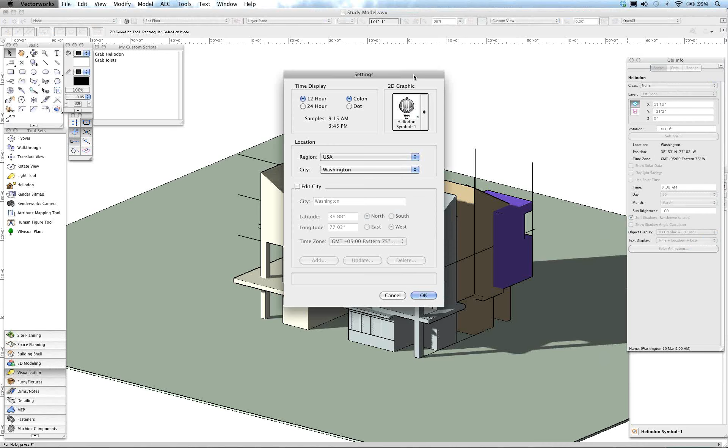And that's all fine and good, but where are we? If I cancel out of this, or accept the default, either one, we can see that we're in Washington. I'll open up the settings dialog box that'll show me a little bit about how I can control the heliodon further. We've basically broken the globe into regions, with the good old USA being one region, then further broken out into cities, and you can see we're defaulting here to Washington, D.C.

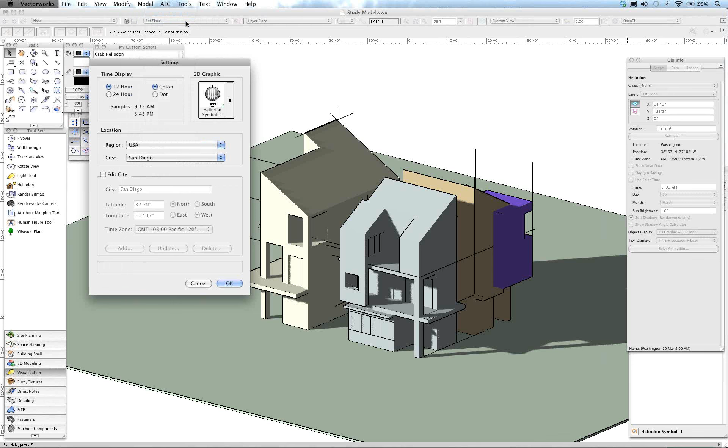I understand many of you are out there on the left coast, perhaps in San Francisco or San Diego. I'll choose San Diego, for instance, and what we'll see is that the sun can now be studied as if you were in San Diego at any given time of the day.

So anyway, that's just sort of a new feature for Vectorworks 2012. Thought you'd like to see that. It can give you some information that might be relevant to your building information model.

I'll switch my view to include maybe a plant object, and as you can see, the sun is going to cast a shadow here under the tree. If I go back to my solar animation, I can move the sun throughout the day and see how the tree casts a shadow on the little buildings.

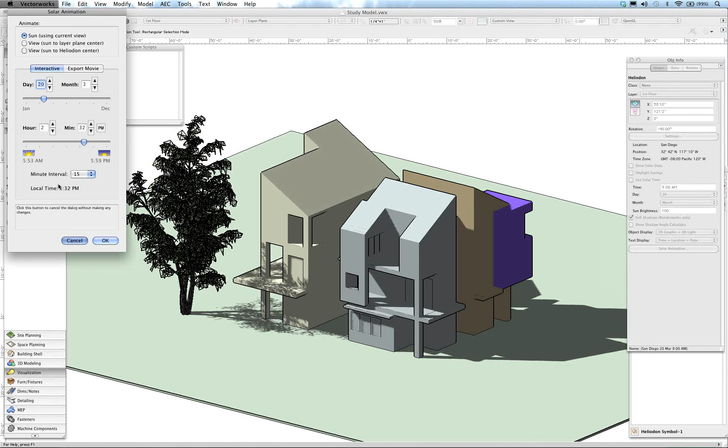Of course, if I move the model around, we can see that in the afternoon we're going to get some sun blocking our porch there, which might be a good thing. So that's a little bit about the Heliodon tool.

What I want to do now is switch back to my first model view, which will get rid of my little tree object there. All I'm doing is using saved views to control that. And perhaps what we can do now is take a look at the model. I just blew away the shade and shadow, and the Heliodon tool here, just so the model will respond a little better.

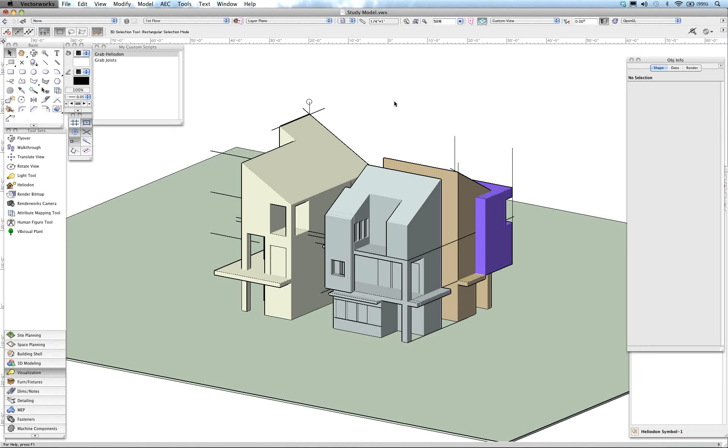So now maybe what I could do is demonstrate how I might go about building an information model, like I said, from a simple massing model. So what I might do is start, let me turn on my nav palette so I can tell what layer and class I'm on. That's always important to have open.

So what I'll do is maybe just start with a footprint of a new building, and perhaps I'll make it, I don't know, 25 feet deep and 16 feet, let's say, wide.

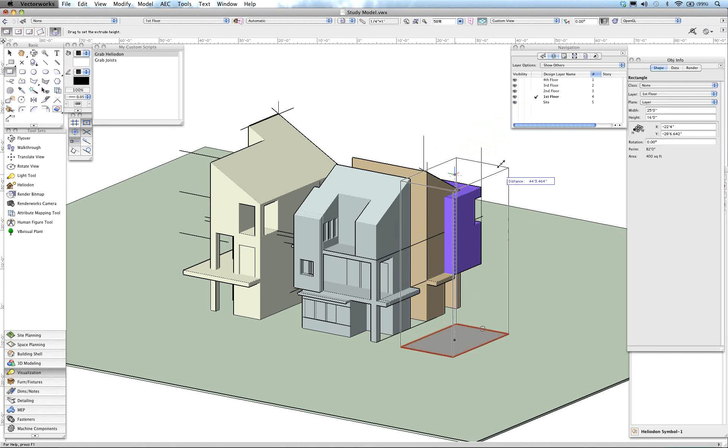So there's my rectangle here, and you can see that it's defaulting to red, which means I can use the instant push-pull to automatically create this new building. As you can see, I can move it up dynamically, or with the little heads-up display there, I can type in a fixed distance, let's say 50 feet. That will give us enough for maybe a 4-story building and some change.

So here's my form. Well, let's further define it a little bit. So I will maybe give it that sort of distinctive roof form like you see here. You can see when things are glowing in blue, what that means is the automatic working plane is sensing a plane and is setting the working plane to it.

So if I highlight this particular front face, I'll go ahead and create a roof form. And then I'll use that push-pull tool. If I hold my Option key down, it will automatically cut off that portion of the roof.

Maybe we'll do that again. I have these sort of covered entry spaces down here, so maybe I'll go through here and create another one down here so we can actually get into the building comfortably without having to stand in the rain. So there you have it.

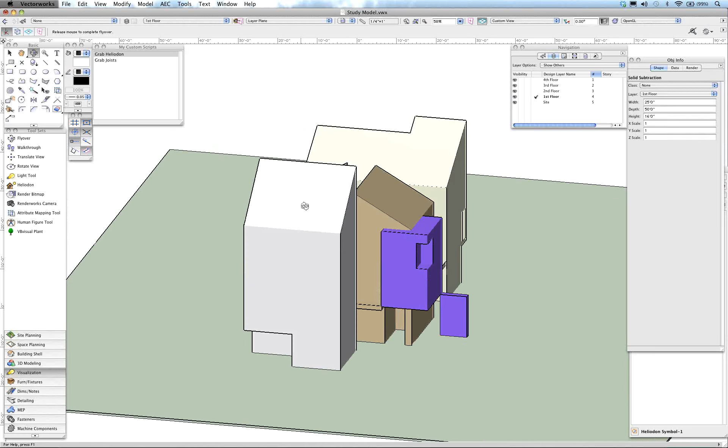There's our form. And we can, of course, use the flyover tool and fly around and check it out and make sure that it's the right massing. I kind of like that. So there you have it.

Of course, what is this object? Well, this object is a solid subtraction. And what information can we get out of that? Well, probably not that much. So what are we going to do? Well, we could either end the webinar right now, which might not be a good thing, or we could continue trying to get a little more information out of our model.

So what I'll do is use a command that can create walls directly from our solid subtraction, and you do that under Space Planning, Model to Floor Plan. If I click on that, we'll see that if I check or uncheck these different layers, they'll be included in the model. And I'm going to go for like a 4-story building, so that's why I've got 1 through 4.

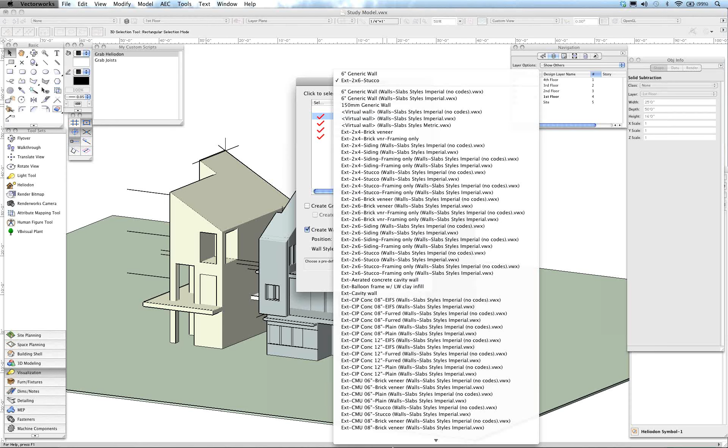Down here, I can position the walls either inside, outside, or to the center of the existing massing model, which is our white blob there. And I'm going to use a wall style - we ship with a whole lot of wall styles, as you know, this is not new to 2012. But I'm going to use the 2x6 stucco wall style because I kind of like it. And I'll just click OK.

And of course, Vectorworks is going to grind away just for a second to create those walls from the massing model. And there you have it. So what I'll do right now is just blow away that massing model form. We don't really need it anymore. These are now Vectorworks walls.

If we go down here and hover over one, that highlight, we'll see in the Object Info palette that it is truly a Vectorworks wall. It's exterior 2x6 stucco, and it's on the first floor. And it's in the class wall exterior, just like it should be. And that's a good thing.

So there we have some walls right from our massing model. We didn't have to go back. We didn't have to redraw anything. We just moved forward.

So let's see what we can do with these walls. Well, they are typical Vectorworks walls. So if I go to my building shell, I'll insert some doors and windows in them, just like you would expect. So here's a couple of windows. Come around here to the front face, pull in the front.

Sure, I like that. Maybe a door object, so we can get into the little model. Here's a door object. That particular door is like a solid core door. Might not like that, so let's create maybe a glass panel door so we could get some light into our project. Yep, like that better.

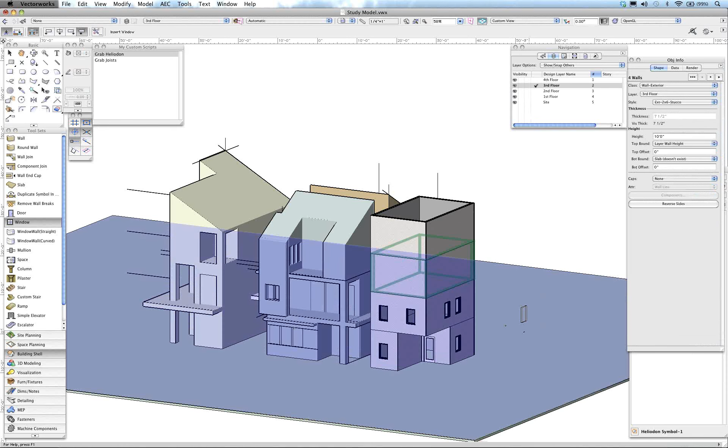So let's go up to maybe the third floor. You can see the whole project's glowing blue - that's because the automatic working plane is sensing the site, but don't let that confuse you. So we're just going to put some more windows in. All I'm doing is moving the window object near the wall, letting it sense it so it glows red there, and then I'm just going to align to the window below and insert my window just the way you always would. So there we go.

See a couple more. Maybe we'll even - whoops, missed on that one - put some on the fourth floor here. So we'll go up here to the fourth floor, go to Windows, align it to the window below. Yep, there we go. It takes a little while, don't forget, because it's rendering each time I make these moves. I've got it set up for rendering in OpenGL.

This isn't a new feature, but I'll show it anyway. OpenGL options here - you can see that I've got my settings. I've got it set up to show shadows and draw edges, so you can kind of see the highlighted edges of the project. So there you have that much. So we have windows in our project.

Well, that's very good, so what would we do? Typically, what we would want to do, certainly down the road, is create a window schedule. So how are we going to do that? Well, let's see, I'm going to go to Show Snap Modify Others in my layer settings. The reason for that is I did notice while I was placing these windows, if we look in the object info palette, that I don't have it checked on schedule. So what that would mean, of course, if I ran a window schedule, I wouldn't get anything on it.

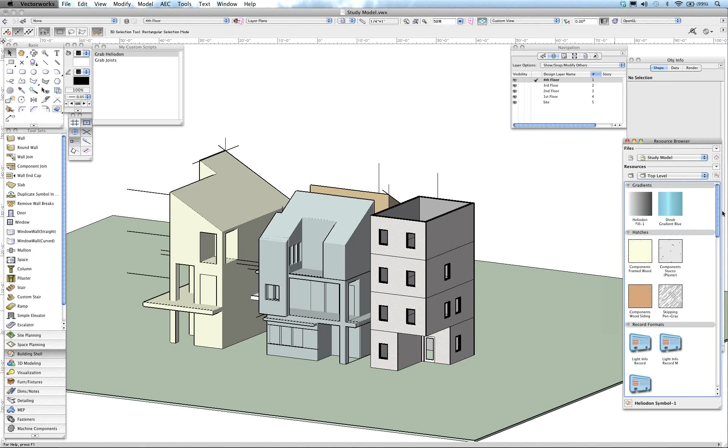And as we can see, nothing happens visibly here, because behind the scenes it created a schedule down in the resource browser. If I right-click and say Open, that opens the window schedule. So we'll place this schedule right here and move the model up a bit so we can see. What I want to do is show a little bit of two-way worksheet ability.

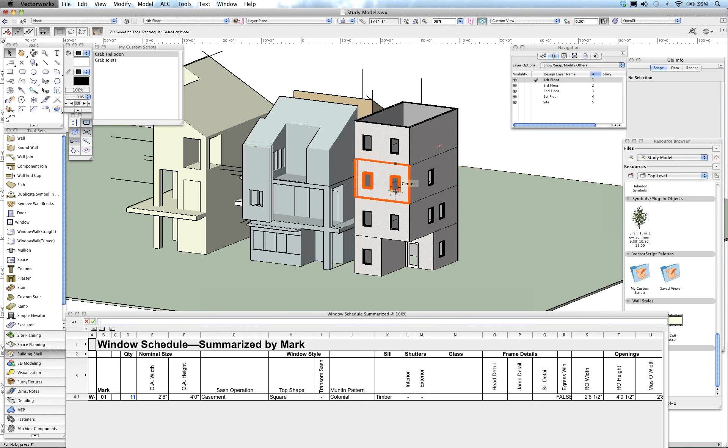Here are all 11 of my windows accounted for in the schedule. Let's zoom into this window and grab it, and perhaps create a corner window. We'll tick corner window here, and it'll go over to the corner automatically. Then its mate over here—we'll tick corner window too, and they'll link up and create a corner window just the way you'd expect. Pretty cool.

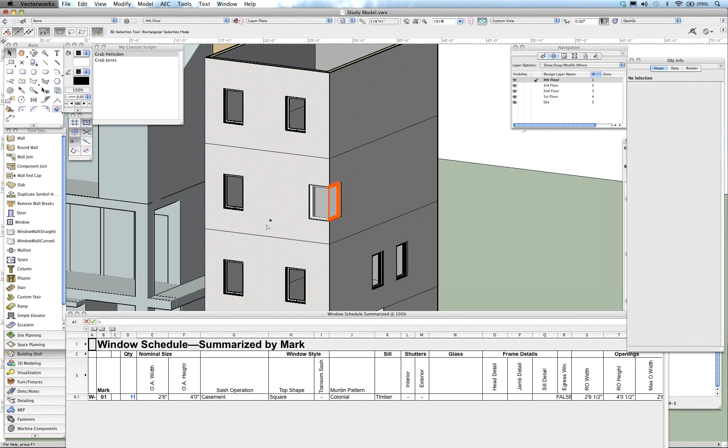So here is another window—actually, that's a wall, so let's pick the window instead. We'll make this one a little wider, typing in 60 inches, and click OK.

Now I want to recalculate the window schedule to reflect those changes. We can see that we now have 8 of the 2'6" by 4'0" casement windows, here at the bottom, plus a couple of corner windows and the one I made real wide.

Well, let's say I don't like that design. I can change it here in the model, or I can also change it here in the worksheet—let's go to 48 inches, and we'll see the window change width. Perhaps this one, currently 2'6", we'll change to 24 inches, and the window gets narrower. If we recalculate the worksheet, it'll be reflected there too.

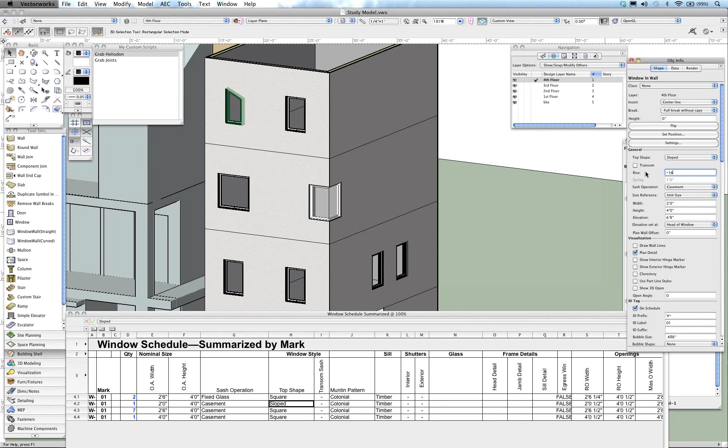There's my window. If we want a square top, which it's defaulting to, maybe instead sloped to the roof once I put a roof on the project. Don't like that slope—it's going the wrong way. Maybe we'll put a 16-inch slope going the other way. So there you have it.

So what we can see here is that I can get the worksheet to control the geometry in the model, or I can change the geometry and it will be updated in the worksheet. That will save you a lot of time and errors in creating door and window schedules. So please, even if you're drawing in 2D, go ahead and use the automation of the wall tool and door and window objects so you can create these schedules.

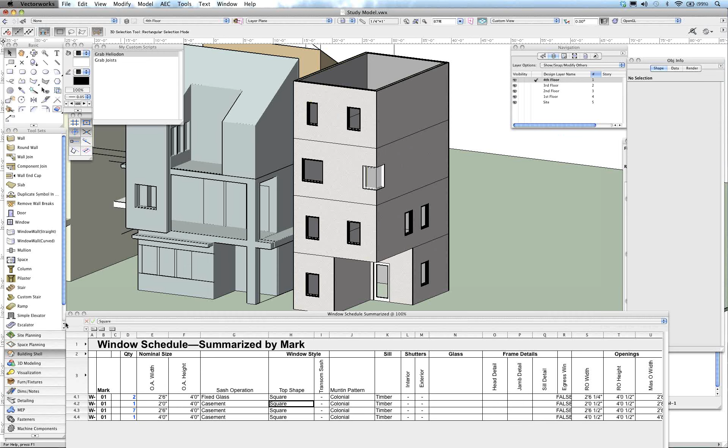So I guess I'm done with the window schedule, so I'll make that go away. Here we have our little model, but right here we have this overhang that looks a bit tenuous to me. So maybe what we should do is put a column object right here under the overhang, and we're going to have to do that on the first floor.

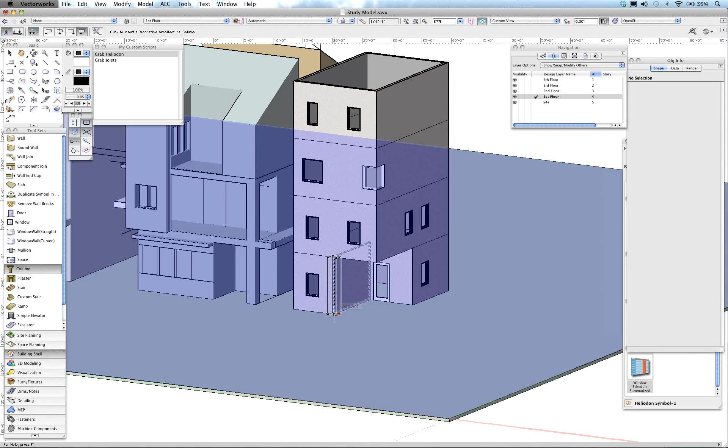Using my cursor cues, I'm going to pick up the corner there, and the corner here. When I drag my column out, you can see the red and green lines join, so I know I've got it right in the right spot. And there's my column.

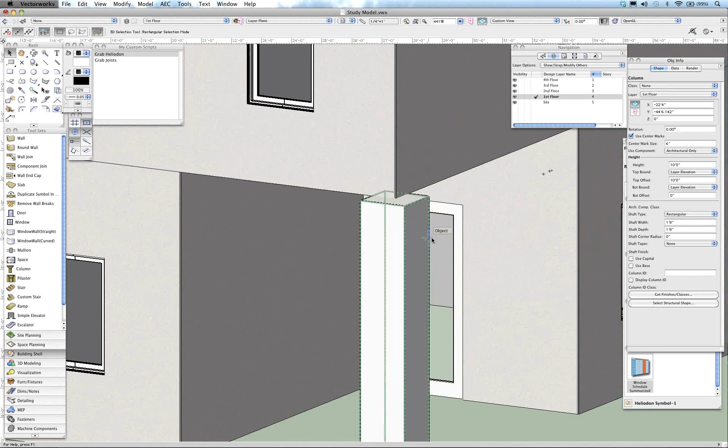Problem is now I have this little overhanging scenario that might be kind of a problem to flash. So now I want to move that column back under the building a little bit. We're in a 3D view, so I need to move it in 3D—you do that by Move, then Move 3D, which gives you all three axes in which to move it.

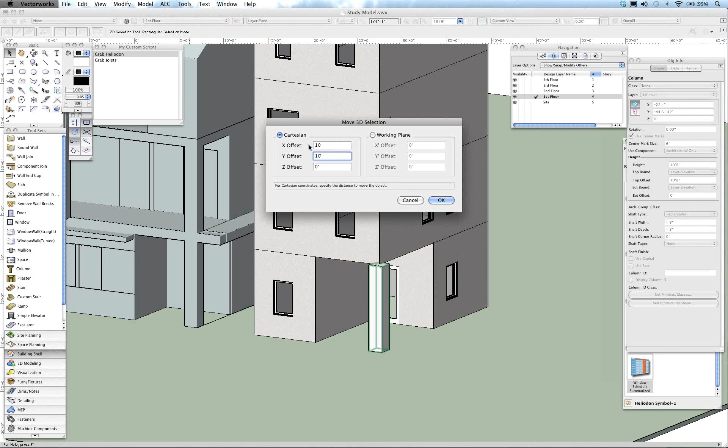I know that column is about 18 inches square, so half of that would be 9. Maybe I'll move it under there about 10 inches to give a little overhang so water won't run down into the column. When I hit OK, the column moves back under the building just the way it should. So there you have it. And if we move around the little building, we can see that we're pretty good to go. Zoom out a little bit.

All right, I kind of like that. Let's see, next I'll be a little cautious of time here.

Since we now have columns, windows, and doors, maybe we ought to create some floors. As you can see, if I rotate the model around, you can see right down through it. There are no floors at all in the building right now, probably difficult to walk in there.

So let's create a floor, more specifically a slab object. I'm going to do that on the 4th floor so you guys can see it happen. I'm going to control the layers a little more carefully so I don't accidentally snap to one I don't want to. With that set to show others, I'll be able to operate here on the 4th floor. I'll use my trusty slab object in the building shell toolset, go around and pick walls like that, and then the green checkbox or Enter key will say OK to accept what I've done.

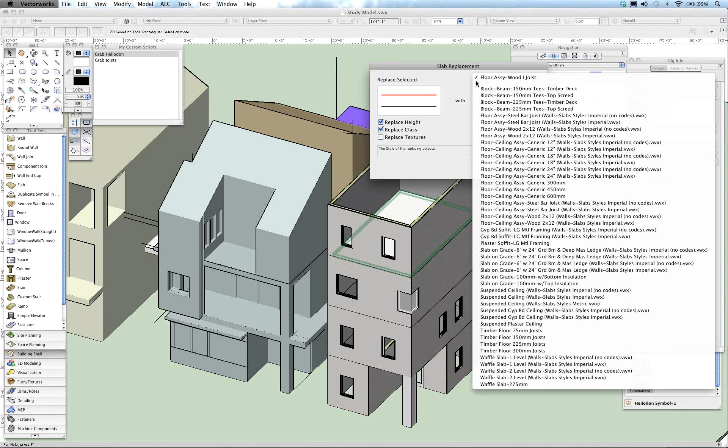As you probably know, Vectorworks ships with a whole bunch of slab styles pre-configured. Of course, you can build your own, like I've done here, floor assembly wood I-joist, which is one I made to accommodate the depth of an I-joist, and we'll get to that in a second. Anyway, I'll just accept the default, and you'll see that the slab is now thick enough to accommodate some I-joists. Well, how about those I-joists?

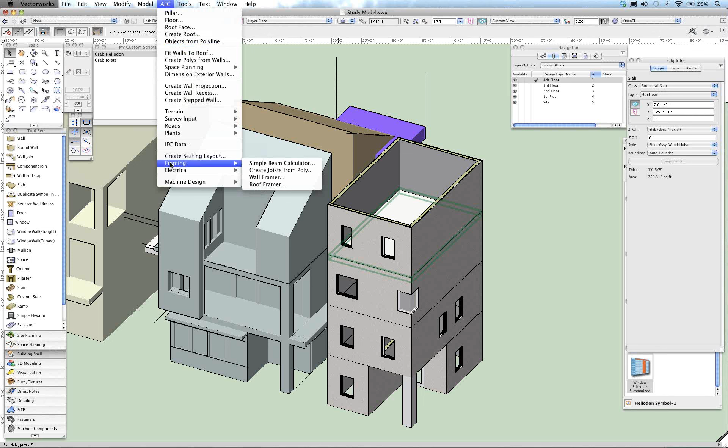Let's take a look at maybe framing this slab. So what we'll do here is go to AEC and framing, then create joists from poly. This command isn't necessarily new, but some elements within it are, like the ability to place our soon-to-be floor joists in a certain location within the slab. This is by component. I only have two components in my slab style: one is T&G plywood deck, which would be the subfloor, and the other is the joist gallery, that's where I want those joists to appear.

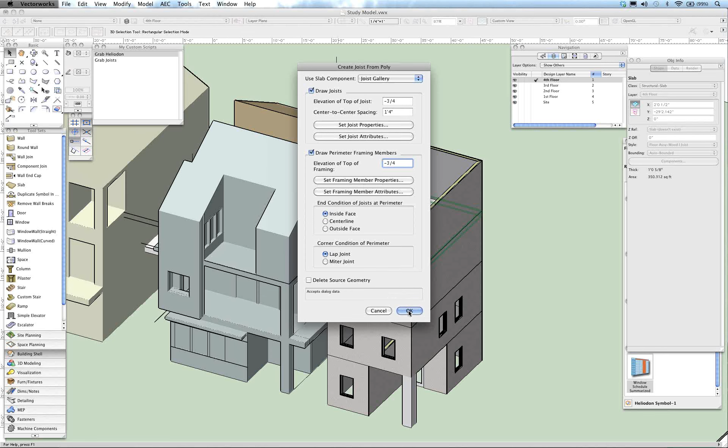So I will just offset them slightly so that they will appear in the correct place, and I'm going to accept the rest of the values here. You could do different joists, et cetera, and further define the colors and texture of the joist, but I'll just accept those values and click OK. Now it's going to ask me how the joists are going to run, which direction. So you pick 2 points, and I'll just say OK.

If I highlight the slab, you can see two things happen: one, it created the joists, and two, it created a joist takeoff for me. This was all automated, I didn't do a thing other than click the mouse a couple of times. So that's a little more about getting down the road towards BIM, as we can now actually count how many joists there are.

But I said I wanted to use engineered I-joists, and these are defaulting to just regular solid beams, as you can see here. So under structural use, I'm going to change that to joist, just so if I run any subsequent schedules, they'll actually show up as joists, I'll know what they are. And then they currently say solid beam.

Well, what I want to do is use an engineered I-joist, which is a custom profile. So I'll select custom profile, and it will take a second... ooh, look, I'm getting odd custom profiles. Gee, let's look at what I got. Oh, I got some trees, well that probably isn't exactly what I want. I actually want these, which of course are I-joists.

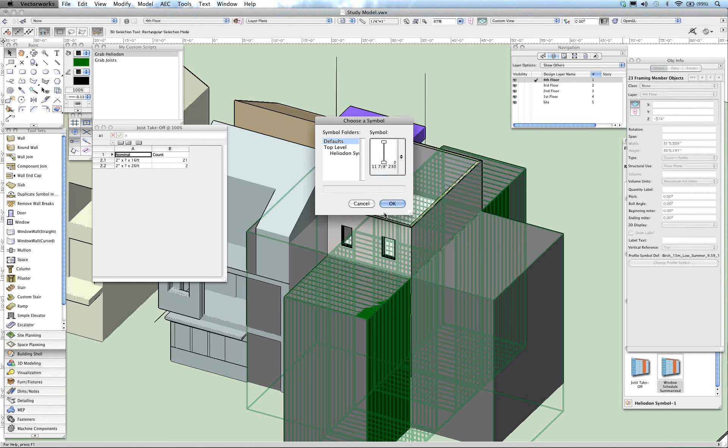For this particular building with a span of about 16 feet, I'll probably choose an 11 7/8 by 230, that's a TGI specific joist. I know and love it, and it will span the distance and give you a nice stiff floor, so I'll choose that. What we'll see here in a minute is it'll get rid of these trees and turn those joists into I-joists. If I go to wireframe, spin the model a bit and zoom in, we can see that we really did create I-joists just like you would think.

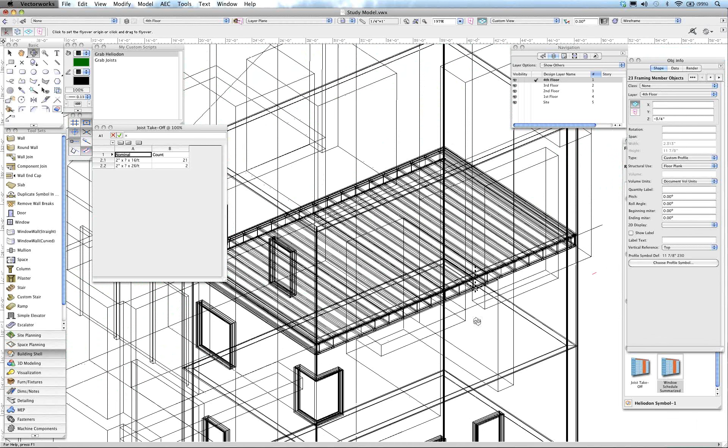So there we have that. We framed the floor, and in fact, if I go to a top plan view, we can cut a section through the building, and we'll see what we've got here.

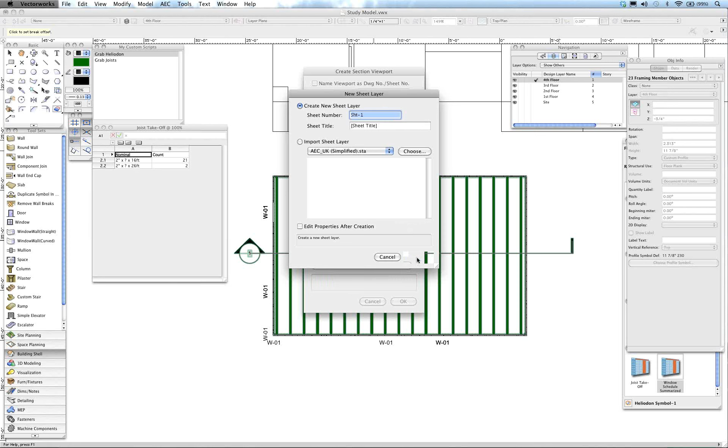So I'll cut a section using View, Create Section Viewport, and we'll create a section just like we have been doing for a while, and I'll place that section on a sheet layer. I'm just going to accept all the defaults here. You could name the sheet and all of that stuff, but I'll just accept the defaults and say OK, whereupon Vectorworks will create a sectional view for me.

And you can see here are my floor joists placed right where I want them. Okay, so there we have it for floors, or floors and slabs, actually. We'll go back here to the model, check it out. Yeah, there they all are.

All right, so next what we've got now, we've got door and window schedules. We've got some floor joists that we can account for. Maybe we want to assign some room finishes.

And we'll do that by going over here to the space planning tool set, and we'll use the space tool. Let's see, I'm going to do this on the 4th floor, so I will turn that and make that layer active, as you can see. And we will click the space tool, right?

And then I'm going to use the paint bucket mode of the space tool and ask it to create me a space. So there it did, it created me a space. And I need to turn on, yeah, I got all the right classes on, so I should be good to go.

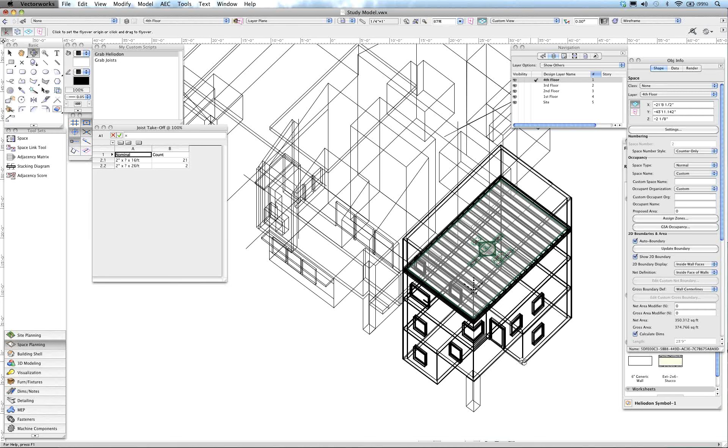We will spin the model around here. Actually, I think what we'll do is just go to wireframe. And I'll go to a top plan view, and this will more clearly show the space tool.

And what you can see is the last time I used it, I used this particular configuration of the space tool, so that's what it's defaulting to. You control that under settings. And if we go to settings, we can see space label - that's how you get these different look and feels of the space tag.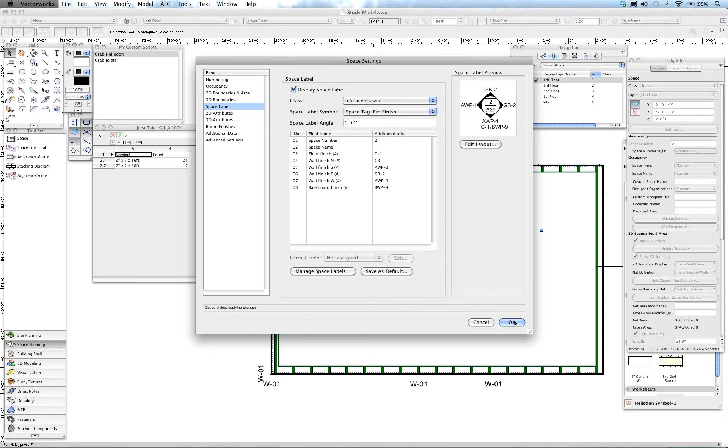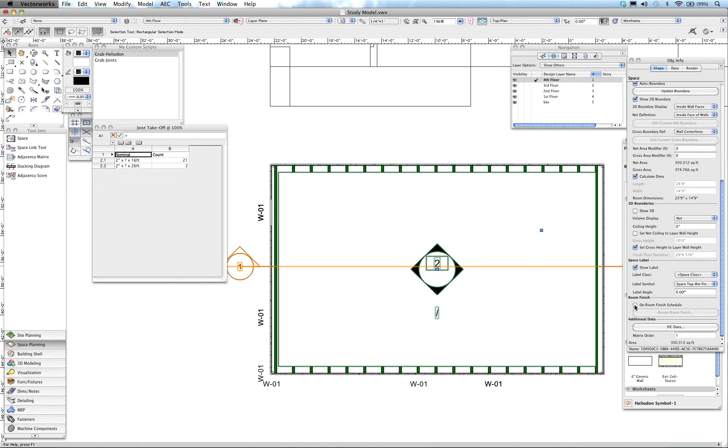And of course, you then can enter finishes per room, and you do that by scrolling down here to the bottom, and you'll see on room finish schedule needs to be checked. If it's not, then you can't get to the assign room finishes button. So make sure that room finish schedule is checked. If I check it, you can see this now is selectable, and we can figure out what we want in our room.

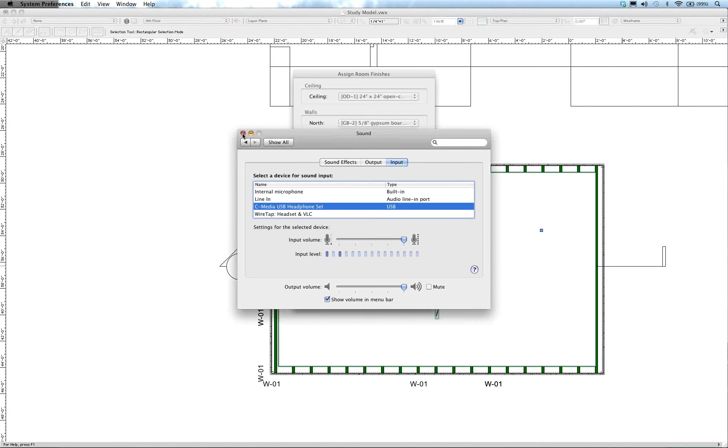Wes, are you there? Your sound's kind of fuzzy there. I don't know, it's still... let me try. Wes, are you there? Sorry for the delay, everyone, we'll just get this fixed here in a minute. No, still not hearing anything. How about now, can you hear me? Yeah, just turn it up a little. How about now? Yep, perfect. Cool. Okay, sorry about that, folks.

Anyway, we were putting some finishes in this room, so I can pretty much just say OK, and what you'll see is the room finishes will appear here in plan view.

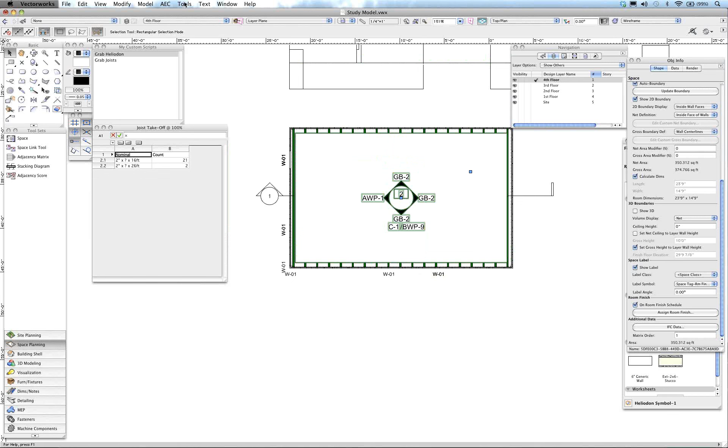If we need the schedule, and of course we do, we can go to reports, create room finish schedule, and it'll ask me, yes, do I want to put it on the sheet, and I can say certainly. And so here's my finish schedule, just the way you would expect. And of course, if you update any of these finishes, this will update as well.

All right, so now we have room finishes, we have quantities of floor joists, we have door and window schedules. So what's next? Let's see.

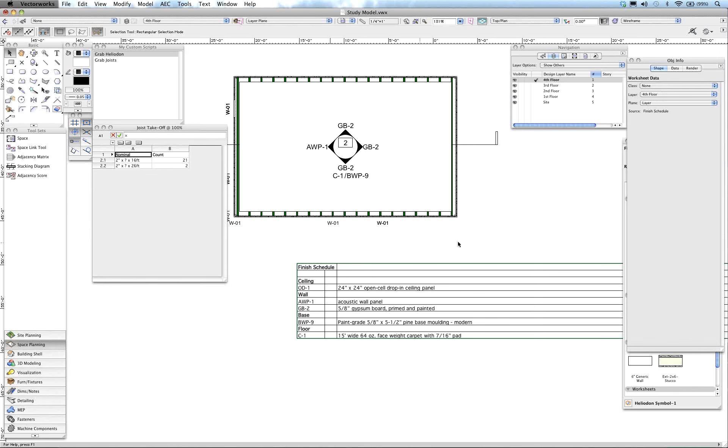I think probably what we'll do is go back to a 3D view, and we'll go to OpenGL. And what we can see, no, I still don't want to save my work.

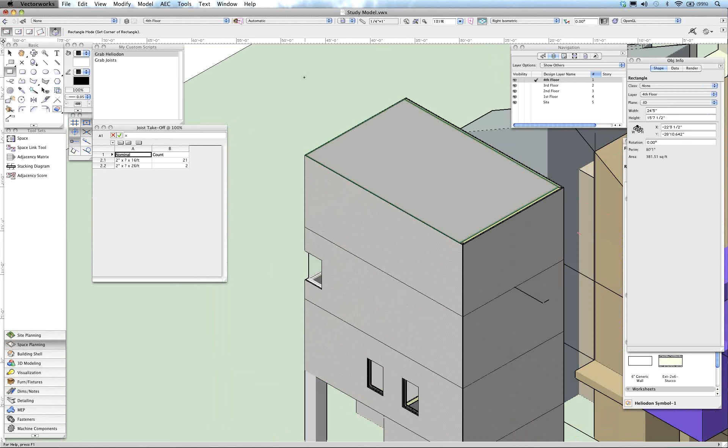We'll put a roof on this little building. Since it's just a mono pitch, I'll probably just use the roof face tool. Go up here to 4th floor. Get my automatic working plane to sense that I want the top of the walls there.

I'll have to make a couple of little adjustments because I missed a little bit here, so I'll just stretch this rectangle out. Right now it's just a simple rectangle. I'm going to increase its size a little bit to give it an overhang, in both dimensions.

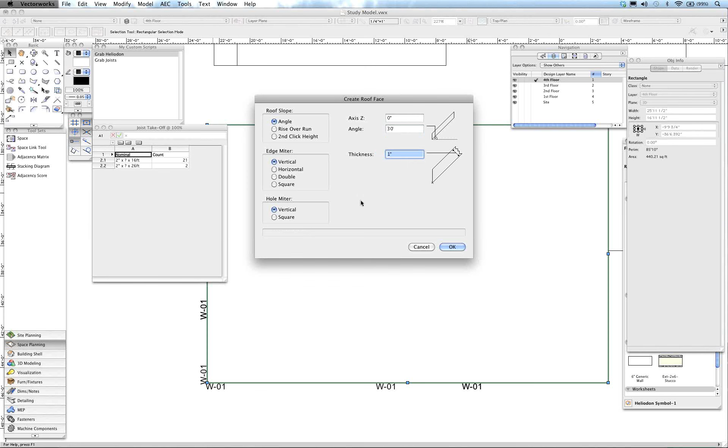Okay, very good. Now let's create a roof face. Simple, we will just go to AEC roof face, whereupon I need to put in some basic information like maybe the pitch, we'll say 30 degrees, and maybe the thickness will accommodate some pretty good, maybe some 2x12, so I'll say 12 inches and say OK.

Now what I need to do is define the upslope, and you can do that with this little arrow. So upslope is going to be into the building. So there you have it.

If we go back to a 3D view, we can see that we have a roof. And of course I created it on the 4th floor, so it's a little low. I should have probably created it on a roof layer, but I didn't. So now we will just elevate it, let's say 8 feet. Very good. So now what we can do is select these walls and fit walls to roof, whereupon the walls will fit to the underside of the roof, just like that.

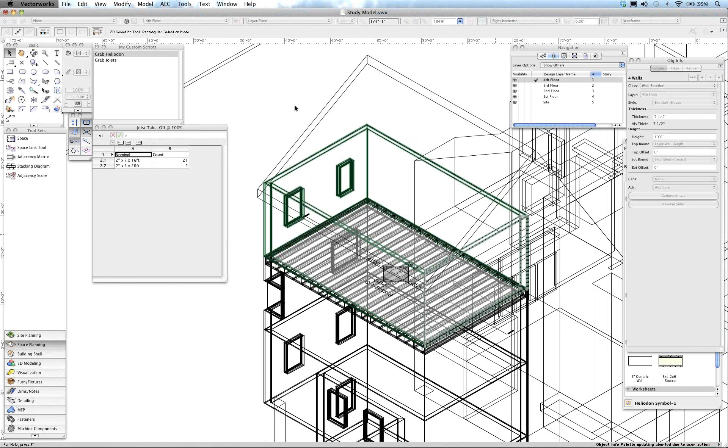Okay, so let's go here to OpenGL, and we can take a little spin around our model. And there you have it.

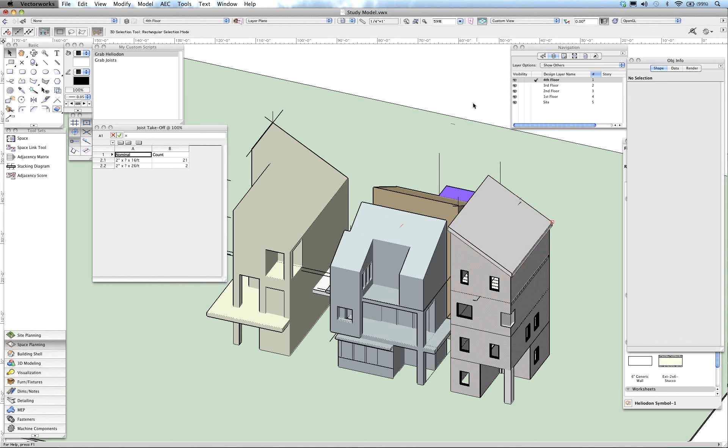So basically now what I have done is I've taken my little massing model that I started with, and I've created a BIM model. So all of these elements now have intelligence. They can be shared down the road with others if they need to be.

If you need to do that, you can basically export your model via IFC or DWG to share it with others. IFC, of course, will maintain all the data that you've attached to your various objects. DWG will give you both a 2D and a 3D look at your model. Of course, data doesn't necessarily flow with DWG. So there you can take your pick. I can show you how to export an IFC model. I think we still have a little time left. This won't take very long.

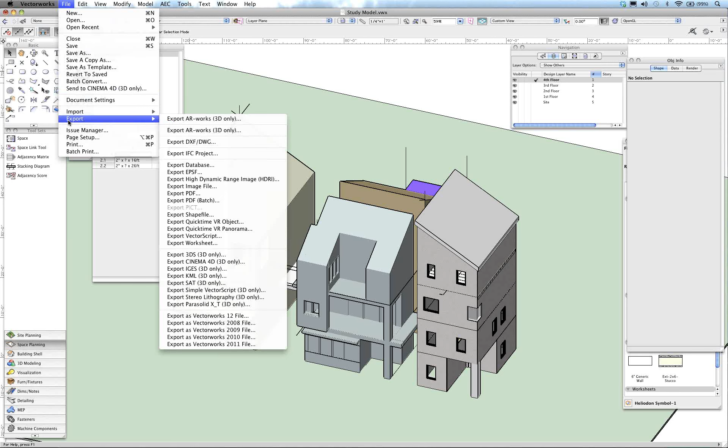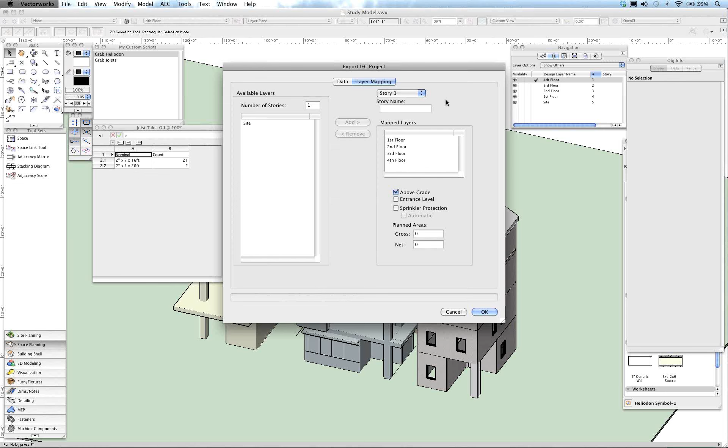If we go to the export menu, we can say export IFC project. And what we'll get here is a dialog box that will actually ask you what do you want to put on what story. Now I didn't use stories in this particular project, so I'm just going to map them all onto story number 1. If I had used stories, we would actually have the individual design layers in story 1. We'd probably have more than one story, and if I say OK, Vectorworks will create an IFC model for me.

As you can see, studymodel.ifc. And if I say save, it will create this model. This might take a little while to do, but it shouldn't take too long. There we go. So if we want to view the model in a viewer to validate the IFC capabilities, we can do that. What we'll see is this will be the only model that is going to be exported. These are just still very much massing model objects, so they won't be exported into our IFC model.

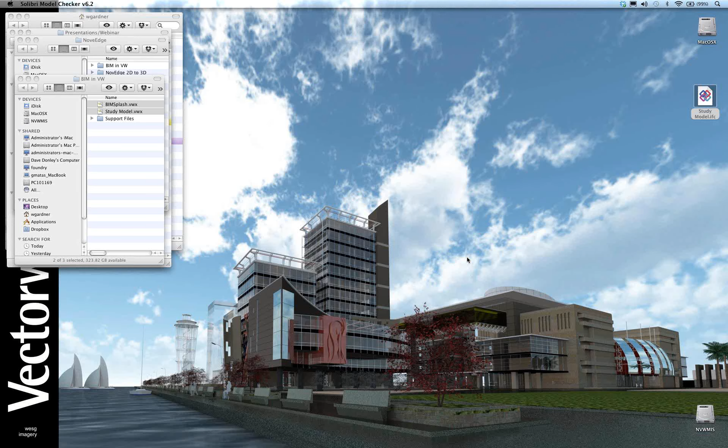So if we close Vectorworks here, nope, we don't want to save our work. And we can see our IFC model here. If I take it into something like Solibri Model Checker, we'll see that we will get our IFC model. This shouldn't take very long.

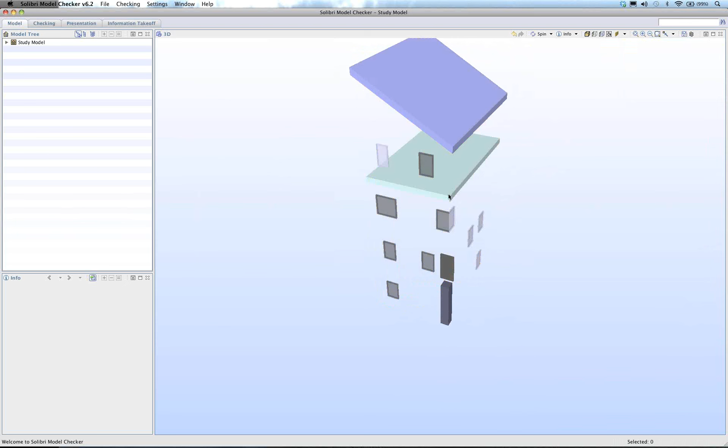So here we have our model in Solibri, and as we can see, all of the elements did come across just the way we would expect them to. In Solibri, you can show and hide, let's say, all the walls, so we'll be able to see the floor structure and that kind of thing. This is Solibri Model Checker, so we can run collision detection and other reports like that.

So that's kind of how you can take a Vectorworks model from this sort of scenario, change it into this sort of scenario where it actually is a BIM model, and share it with others. So that's kind of it for me. I'm hoping that I ran the required amount of time.

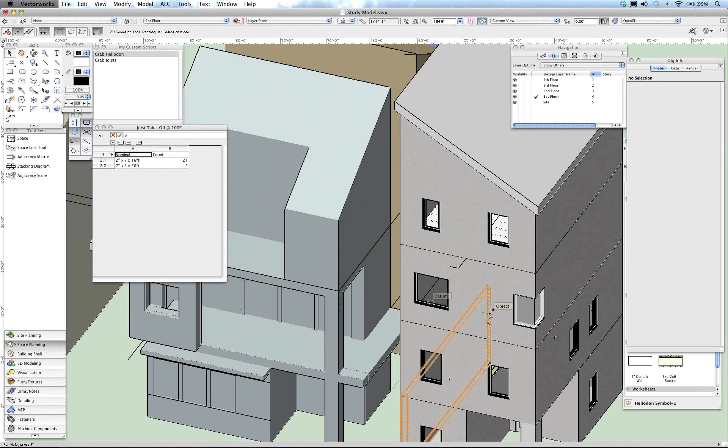How do you update the window mark? All of them show W-01. Should they be different marks? They could. In this particular project, the style, let's say, of window schedule I used was everything that is window type 1 would have shown as 1. I should have gone in there and, let's say this window that I made 5 feet wide, I should have given it another number. It does not do that automatically. So yeah, that's my fault for not updating the schedule when I created it. I hope that answers the question.

Yeah, I think that was great. Here's another one from Joshua. He said he noticed there are several stories to each of the models. Is there a simple way to set that up?

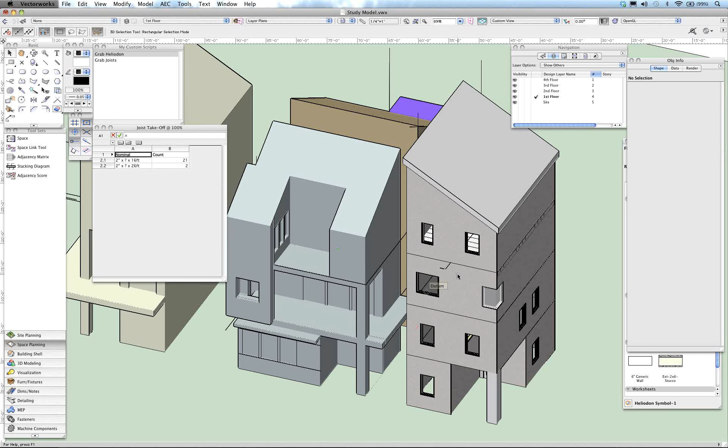I'll go to a front view which might show it a little more clearly. This is what I did just with these construction lines. I created 4 stories, each one actually floors. I didn't use stories—that's something new to Vectorworks 2012 which I did not use. It would have added too much complication to this presentation. So all I did was use common design layers, just the way we've always used them, and I created 4 of them. If we go up here to organization and go to design layers, you can see them: 1, 2, 3, 4, and I have a site layer with sort of 0 elevation, but everything else is just stacked 10 feet above the other.

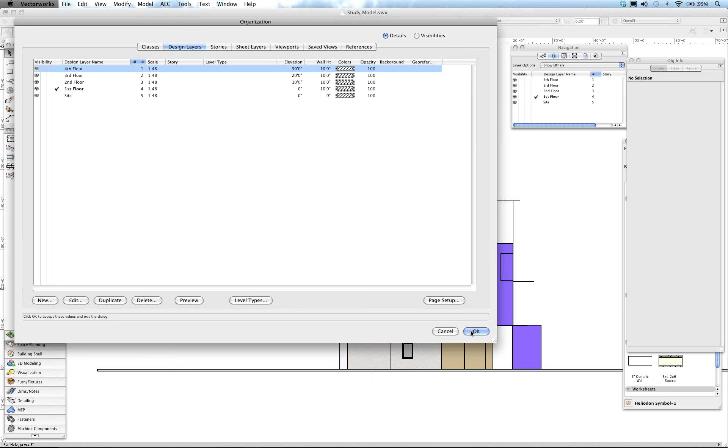Here's a question about your hardware more specifically: what kind of Mac processor and RAM are you running? Let's take a look at that—that's important. We'll go to About This Mac. This machine I am using is a MacBook Pro laptop, fairly standard, fairly new, fairly nice. It's an i7, as you can see, Intel dual-core i7. It does have 4 gigs of RAM, which I think for this machine is standard. And you can see I am running 10.6.8, which is not Lion—we haven't updated yet, or at least I haven't. So that's kind of it for the hardware.

Okay, cool. Here's one from Bryce: if you import an IFC model, are all the parametric capabilities for design revising retained? No—well, actually it's a yes and no kind of answer. Some of the objects retain their parametric capabilities, and some do not. Most are locked, so they become sort of frozen, if you will.

Here's one from Will: how about importing IFC/BIM info from other platforms for coordination and scheduling? Sure, great question—actually IFC is designed to do just that. On the import side, we can import IFC, and of course all the major players like ArchiCAD or Revit or Bentley Systems can also create and export IFC models, as well as a bunch of structural packages. So yes, you should be able to bring all your model data together. Furthermore, I'd recommend, if you're going to do that, bringing all your model data together in a program like Solibri or Navisworks. Solibri runs on both Mac and PC, and their viewer is free, so you'll be able to validate your model before you send it out to someone else. So I hope that answers that.

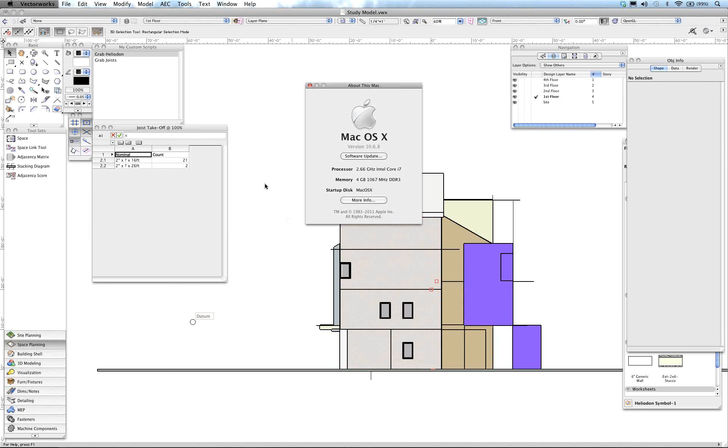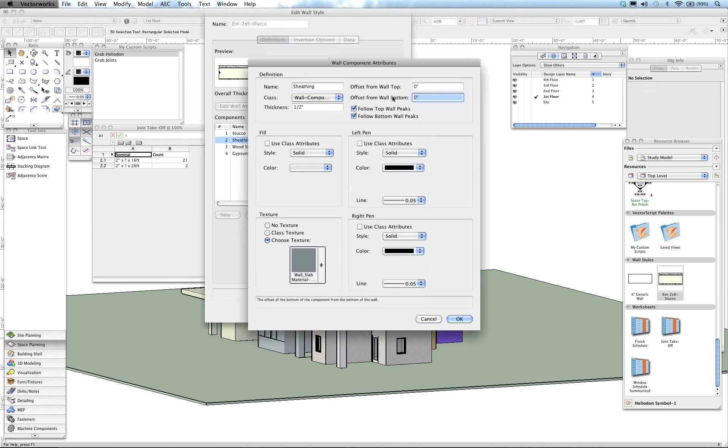Let's get to one from John: how do you adjust wall heights, floor levels to match real-world dimensions? In these particular walls, what I would do is create a wall height to exactly match what I'm going to build. So if I needed an offset, let's say for the siding to overlap the structural system, you'd have done that in the wall style. Let's say the stucco and the sheathing—I'll pick the sheathing and give it an offset, if my floor system was 12 inches thick, I'd put a -12 offset in there, and that would get the sheathing to lap down over the floor structure just the way you'd really build it. Hope that answers that question. Yeah, I think that was good.

Here's one from Irving: has the capability or compatibility of exporting DWG files been improved over previous versions of Vectorworks? Yes, that's something we typically pride ourselves in. We realize, of course, that a lot of folks, particularly in the engineering world, use Autodesk products like AutoCAD, so of course we need to talk DWG both on the import and export side, and we can import and export right on up to 2012.

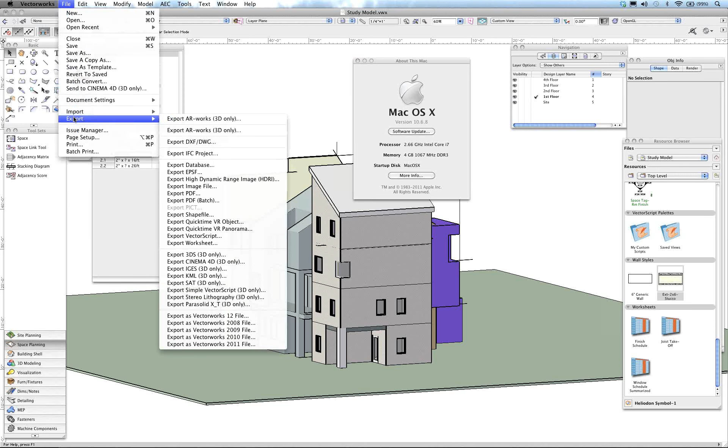Let's get to a couple more here. Here's one from Zeno: how can I export 2D files in DWG format, for example a plan view of the third floor? You might want to do that by sheet layer. We go to export—I only have the one sheet in this particular model; if there were more, they would have shown up here. You basically just check the ones you want to export, and if they're in plan view, they will be exported as plan view. You can also export viewports as 2D graphics in model space—this brings it right on into their model space. So that's something you might want to consider.

Okay, great. Here's one from Alex: what is your preferred method of decomposing the model into 2D construction documents in an editable form?

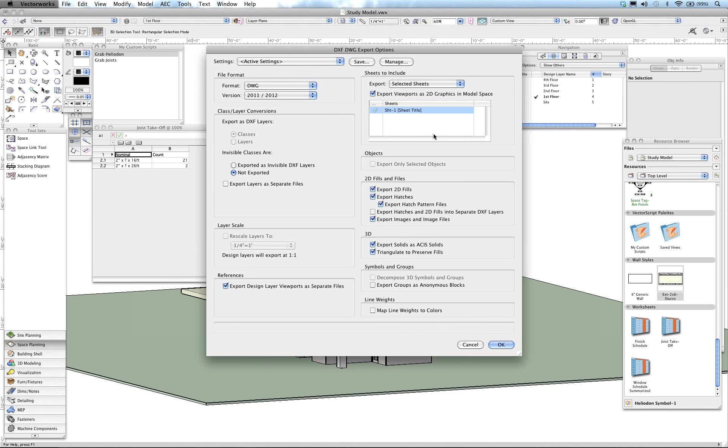I could talk about that for 3.5 days, but to make it quick: what I typically want to do is build my model in design layers, and then to present it or create sheets to print or PDF, you make sheet layers from them, which become your 2D information.

Here's one from Ralph: I see the program has great support for framing. What sort of support does it provide for the MEP disciplines in building model creation? We do offer a few tools for MEP - we have piping object tools, we can create some HVAC objects, and these will be in both 2D and 3D. We also have some electrical componentry, so if you want to create a wiring diagram for a building, you can certainly do that.

Okay, one last question from Eric: can you auto-generate roofs, and how? Are the roof types like the wall and floor types, or did you have to create them the way you did? That's a really good question. Since this was a simple mono-pitched roof, I created a roof face - they're not highlighted here.

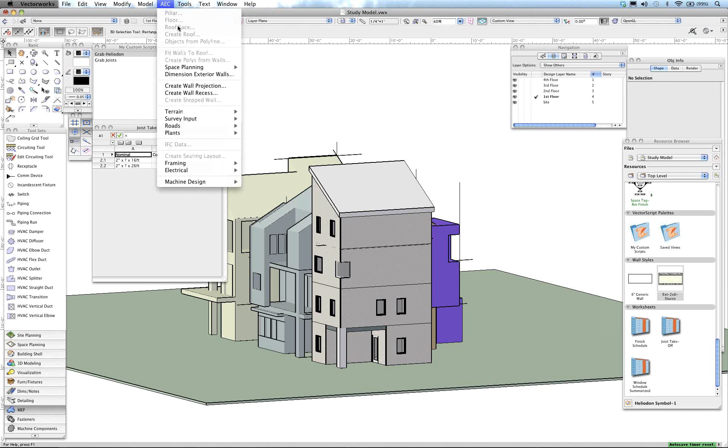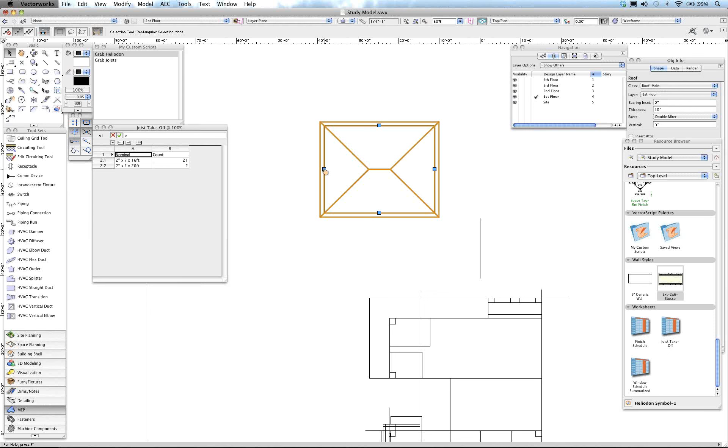To create a roof, you can pretty much do it like this - let's see, create roof, and it'll ask me some parameters, and if I say okay, there's my roof. So it creates a hip roof out of the box. These blue nodes, if you click on one, you can change it to a gable end - sure, I can do that. I can add or subtract overhang - yep, so there's my gable end.

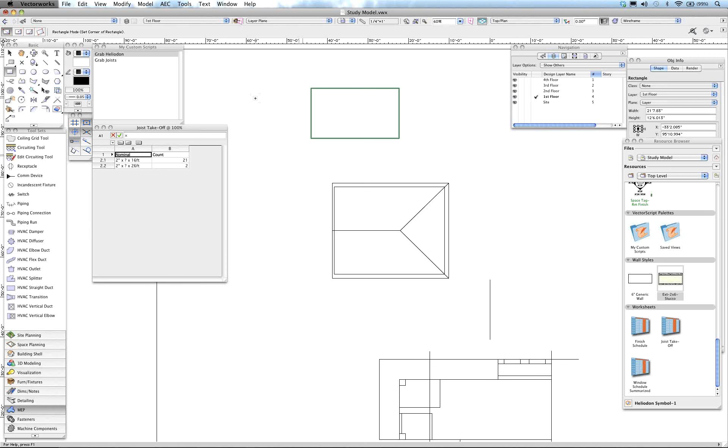That's kind of how to create roofs. You can create roofs from a shape like I did, from a rectangle, or you can actually use the walls - so if it's a two-story house, use your second-story walls to create the roofs from. You go around and pick all the walls and then say create roof.

Okay, I'm going to switch it over to my screen and we'll wrap things up here. Again, thank you, Wes, that was truly fascinating, I'm sure everyone enjoyed it as much as I did. Thank you for having me. I guess I need to apologize for our audio, I'll check into that and see what's going on. Don't worry, quick fix, no harm done there, okay.